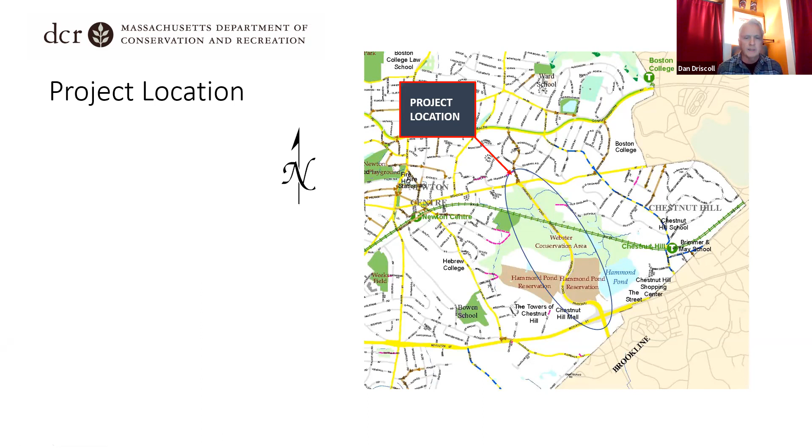The existing parkway was built in 1934. The roadway consists of 2 lanes in each direction - you can see the image to the right. The overall length is just about 1 mile. The roadway crosses over the D branch of the MBTA's green line on a single span bridge. It's easy to miss that bridge, but it's right in the middle of our project area. There are 3 signalized intersections within the project limits, the most complicated of which is Beacon Street, and we'll be talking about that a fair amount tonight.

We've already initiated coordination with MassDOT regarding the required modifications to the bridge and the minor improvements at Route 9. We've also hired Lynn Associates as a sub-consultant on our team to actually do the bridge retrofitting that's going to be required to safely cross pedestrians and cyclists over that bridge. As you can see in this image, there's really limited sidewalk and bicycle accommodation currently on Hammond Pond Parkway. There's not even a fog line to ride a bike inside. So if you bike this road, you are currently cycling in an active travel lane. Next.

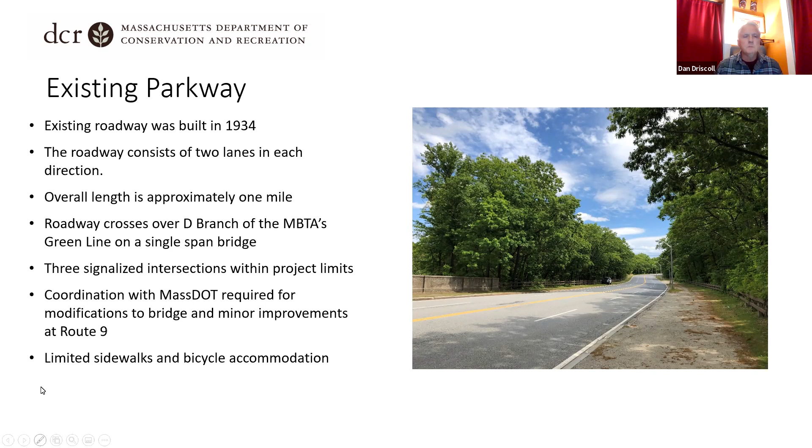Our project goals: we've begun to redesign Hammond Pond Parkway as a complete street gem in the DCR Parkway system. For anyone not familiar, complete streets is an initiative underway for about a decade, where DCR has really taken the forefront with DOT to transform our streets so they're comfortable for all users. The second goal is to provide safe bicycle and pedestrian accommodation along the parkway via a 12-foot wide shared use path.

We're going to provide 2 travel lanes from Beacon Street to the shops at Chestnut Hill Driveway, meaning a road diet taking out 2 lanes of travel. We'll maintain existing travel lane configurations from the shops at Chestnut Hill Driveway to Route 9, and provide improved access to adjacent conservation land, which we'll show you later. We're also going to construct landscape buffers between the roadway and shared use path with extensive native plantings, and replace all existing lighting with historic period lighting more reflective of Parkway character.

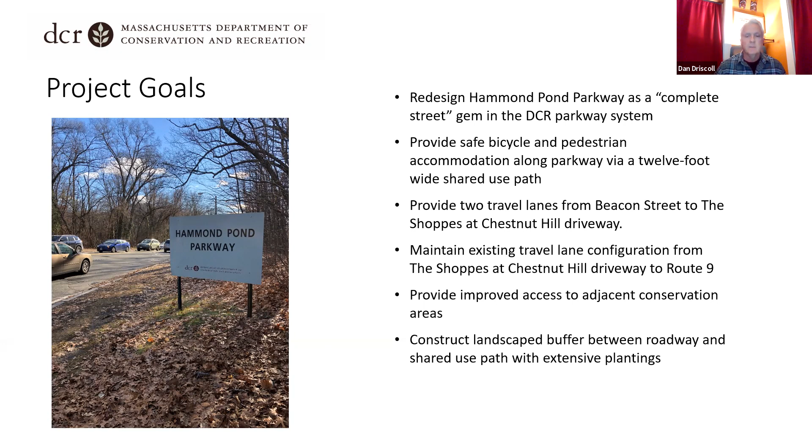I want to mention that DCR has been working for about 3 years now on a comprehensive Parkway master plan for most of the parkways in our system across the metropolitan region. That Parkway master plan is the most extensive plan we've ever done. It's now complete and we're working on a release strategy right now—hopefully in the next month or two we'll get that out to the public. But prior to the master plan coming out, we've already begun, long ago in the last 5 to 10 years, a major effort transforming both the culture of DCR and how we see our roads, engaging in extensive large-scale projects to transform the region's transportation for pedestrians and bikes.

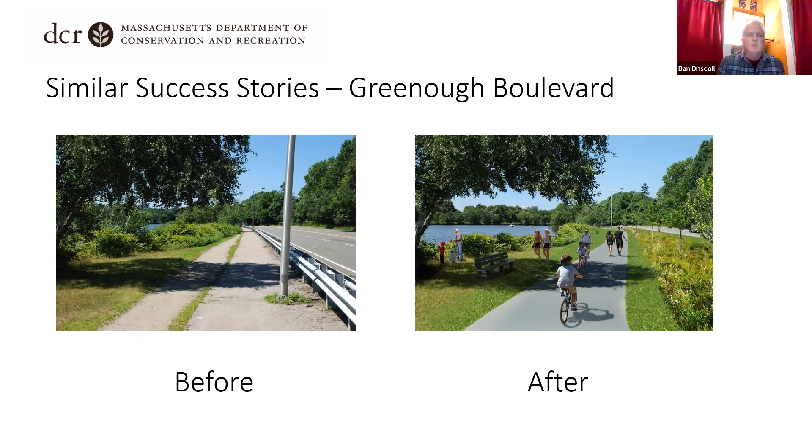So I want to show you a few images of some of our bigger success stories. This is Greenough Boulevard in Watertown and Cambridge. You can see the before and after. Similar to Hammond Pond Parkway, we took out 2 lanes on that project.

This is a road in Newton—many of you may be familiar with it. This is Nonantum Road in Newton, right along the Charles River. Again, we did a road diet and took a lane out, allowing us to widen the reservation, put in an appropriate 10-foot path, and put in an appropriate barrier for safety. You could see on the left it was a really dangerous condition before we did this project.

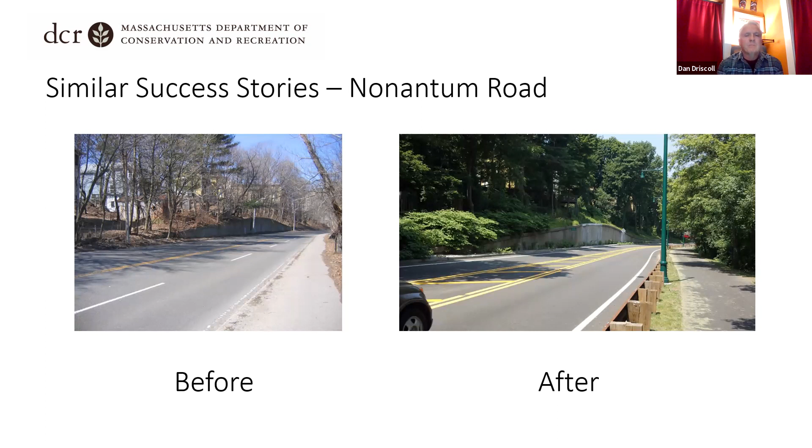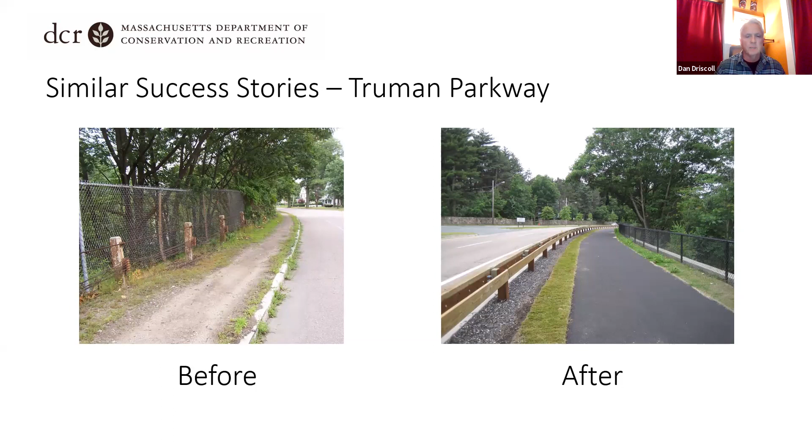The last example I wanted to show was Truman Parkway, another DCR parkway. The before and afters kind of speak for themselves. This road is in Boston, just outside Mattapan Square. I want to note that all of these projects were completed pre-pandemic, and despite doing road diets on all of them, we've had no issues with increased traffic congestion or backups. So we're confident that when we do the right traffic analysis, we can do these kinds of projects and have great success meeting complete street standards.

So what have we been doing so far? The project started in 2019, when DCR issued its notice to proceed to BSC Group. We completed an extensive survey of the entire Parkway and did extensive traffic counts. I want to note that all the traffic counts and analysis done for this project were done pre-pandemic, so we're confident the data we collected and the analysis we've done is reflective of a more normal time in our world.

I mentioned we had coordination meetings with the city—we've actually had 3 now. Mayor Fuller was in attendance at 2 of those meetings and has offered great input on the project. We have an extensive traffic report that confirms our analysis and our belief that we can do a 2-lane road diet. In 2020, we engaged in a major lighting coordination meeting with utility companies to figure out how all the conduit is going to work for the new lighting system, and we also got to our 25% design plans and cost estimates.

And here we are tonight at our 25% public meeting. We've really gone a little bit beyond 25%, but that's what we're calling the current submittal.

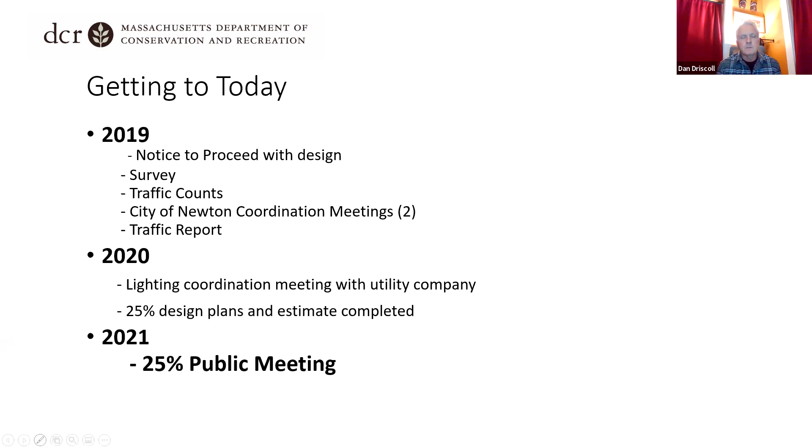At this point, I'm going to turn it over to BSC Group and Peter Reed and his team to walk you through some of the details in how we're going to modify these cross sections and give you an understanding of what things are going to look like out here. Peter: Thank you, Dan. I am going to walk you through a number of graphics that visually show all of the things Dan has been describing about our proposed improvements. On this graphic, we're looking at Route 9 at the left-hand side, at the south end of the project.

We start the shared use path on the west side, right when we get out from underneath Route 9. Under Route 9, we are going to be widening that sidewalk by a few feet. Any of you who have been under there know it's pretty tight, so we're going to do some improvements to gain some width under the bridge.

Once we get further north, you can see the lane configurations we're showing. It's the exact same lane configuration that's out there today. We will be doing what we call a mill and overlay in order to get a new roadway.

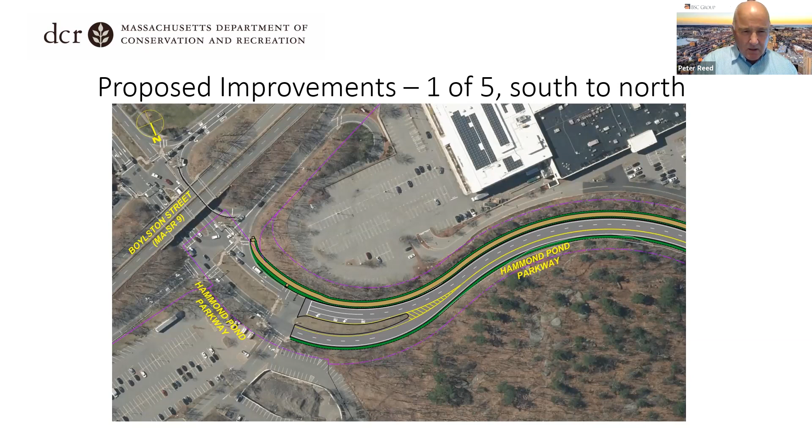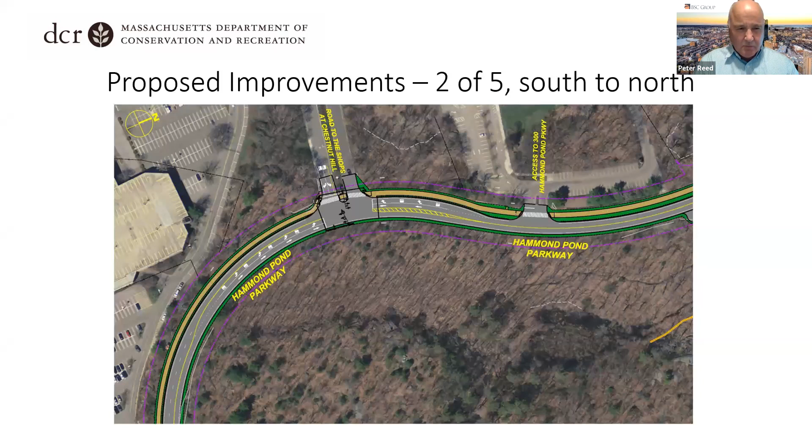We proceed northward from there and pass the 300 Hammond Pond Parkway driveway, which is the BC facility. Once we get past that is where we go to 2 lanes, 1 in each direction, with a 10-foot wide strip shown in green, and the shared use path is 12 feet in width.

Continuing northward, you can see the BC driveway there. A little bit further north there's an existing parking area today which allows for a few cars. We're going to formalize that and add a few more spaces. From the parking lot itself, we'll have a sidewalk on that side that continues up a couple hundred feet, and we'll have a mid-block crossing, which is shown there.

All of the lines off to the sides are the extensive trail network in the conservation areas that Dan mentioned. We're also showing some wetlands there, and I will talk a little bit more about that in a few minutes.

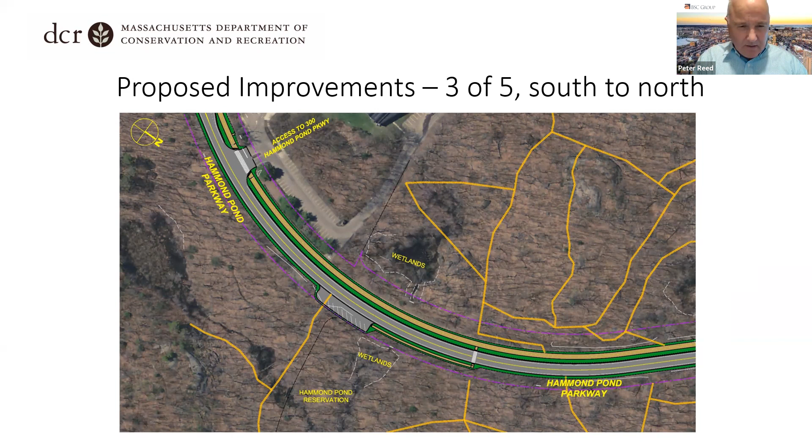For the conservation land, there's currently a couple of additional informal entries to that trail network that we're really hoping to close, because we don't think they're safe spots to be accessing and crossing the road from our proposed shared use path. We can talk more about that.

Continuing northward here, we hit the bridge that Dan mentioned. As he said, Lynn Associates is doing the design for it, and we will be coordinating with Mass DOT.

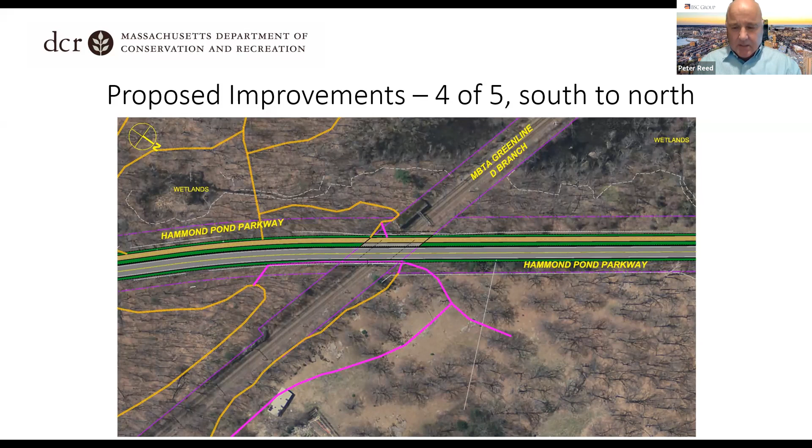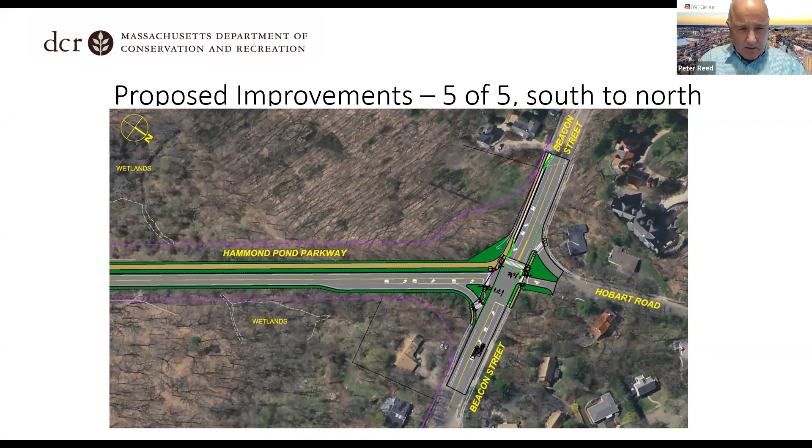Oops, I went one too far. Okay, sorry.

However, the right turn lane from Beacon Street onto the Parkway—the slip lane that's there today—has been removed and replaced with the shared use path.

Hobart Road is going from, you can see there, we've combined the straight and the left turn lane. And on the northbound from the Parkway onto Beacon Street westbound, today we have two lanes that turn left into one receiving lane, and that is a hazardous condition. There have been a number of sideswipe accidents there.

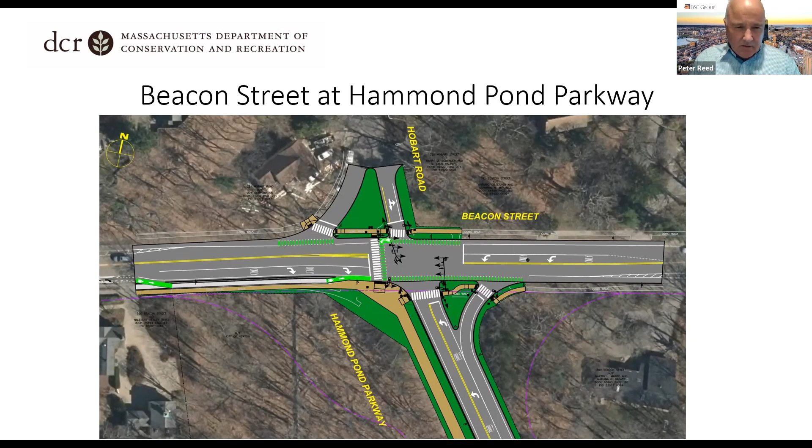So we are proposing one lane for the left turning traffic, and you can see the right turn slip lane. Now what we want to do is walk you through the signal sequencing for the intersection.

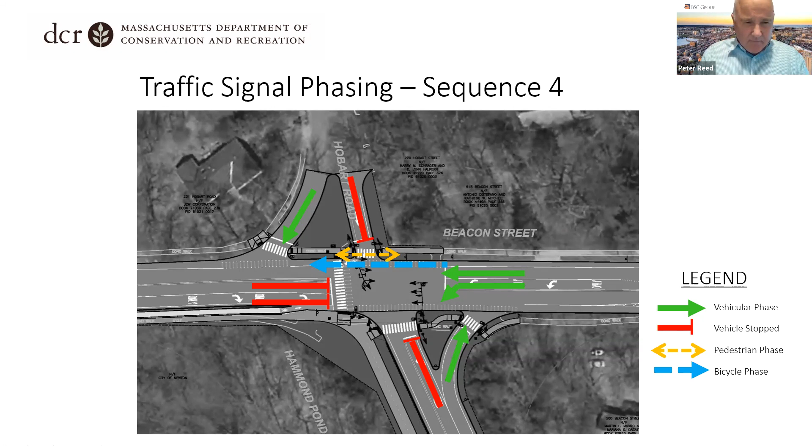Peter, could I comment quick on this?

I just wanted to say that this also marks what DCR sees as the beginning of phase 2 of Hammond Pond Parkway. So we understand that if you choose to continue, you're probably going to have a little more advanced cycling skills to navigate this. But phase 2, we hope to continue all the way to the Newton Street, LaGrange Street Rotary in Brookline. I'll say we're pretty confident there's not going to be a way to do a road diet on that section, so it's a different kind of project where we'll be looking to come into DCR-owned land. There'll probably be some more environmental impacts, and a lot of volunteer growth would need to be removed.

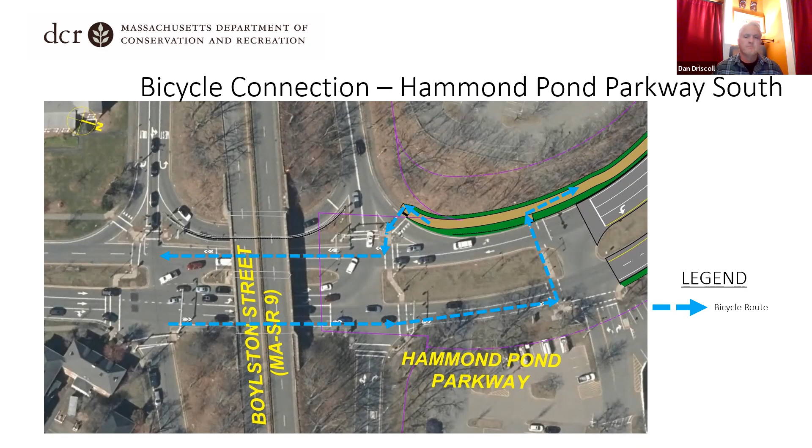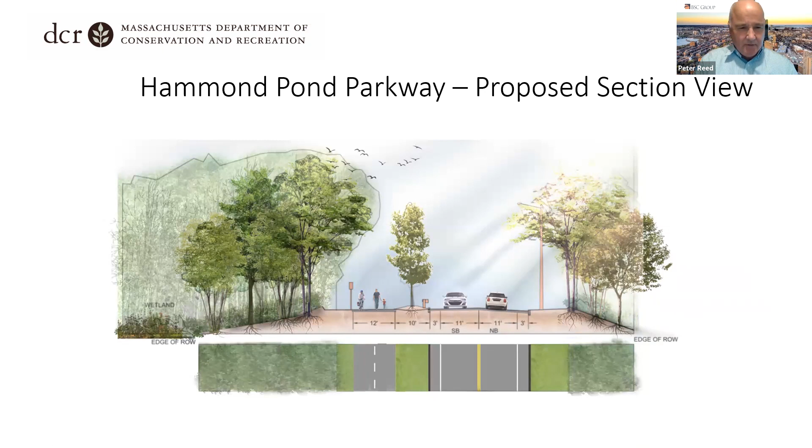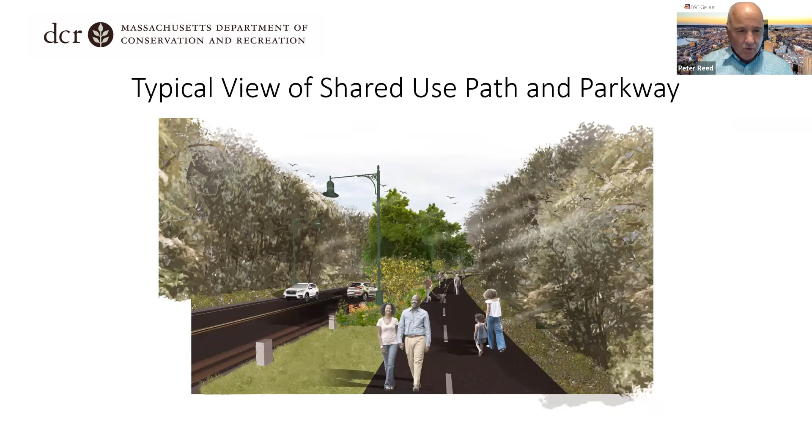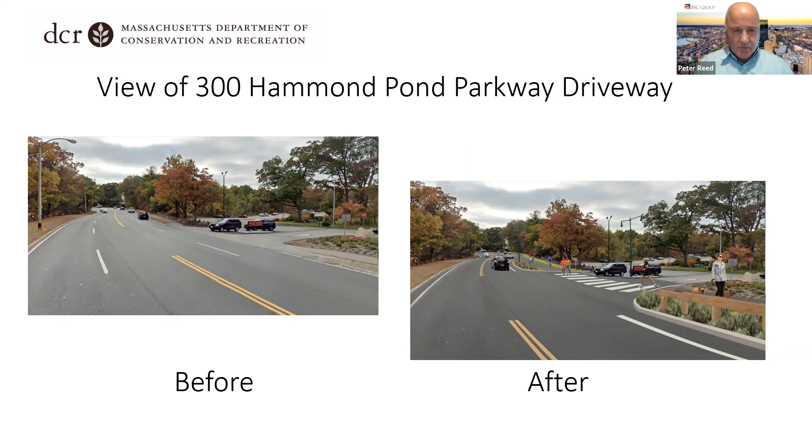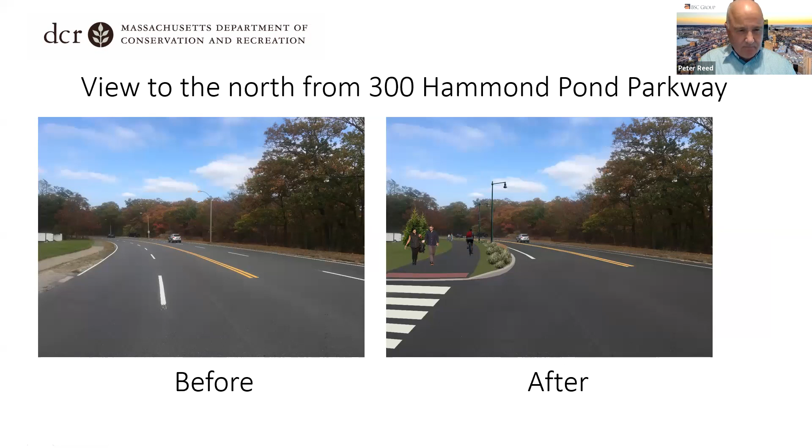As you leave Beacon Street, you go downhill, hit a low point, and then start back up toward the MBTA bridge. At that low point, if you were walking, got out of your car, and looked over the edge, you'd see this brook. It's a box culvert, and today the existing drainage system, the catch basins and manholes, all discharge directly into the side of this box culvert.

We're planning to remove those connections from the box culvert because today the pollutants from the roadway flow right down into the brook. Under the proposed conditions, we would plug those outlets into the box culvert and discharge the water some distance from the brook, getting overland flow, which helps screen out the pollutants, and we also get some infiltration. So those are our goals for stormwater design.

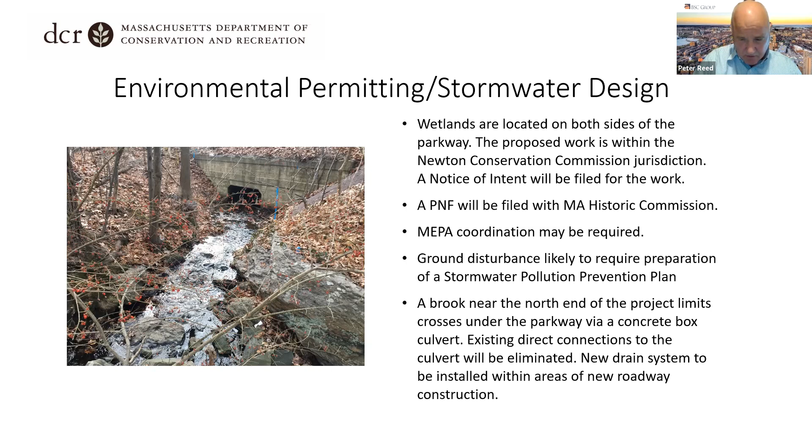Was there another slide here? Is this the slide we want to end on, or do we want to go back? This is fine here, Peter. Go ahead, okay Jenny. Thank you, everybody.